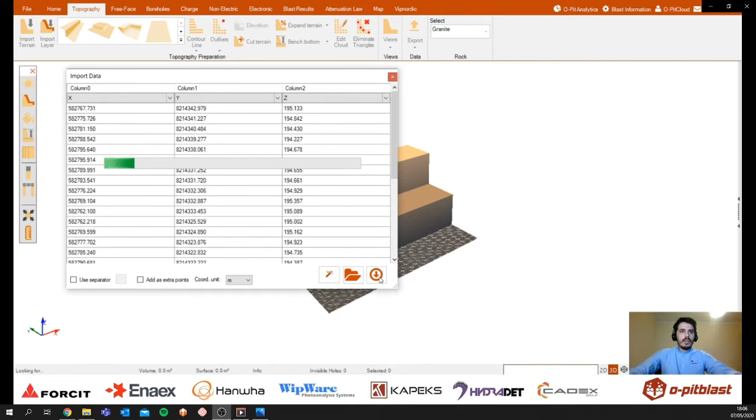Now the software asks us which is the X, Y, and Z information on the file, so the software can produce the triangulation. It will ask us for outliers. We recommend eliminating those outliers. Okay, so this is the terrain, finishing the triangulation.

This terrain was built in the field by a GPS survey controller. So we don't have a lot of detail like it would be from a drone. But I will show other examples.

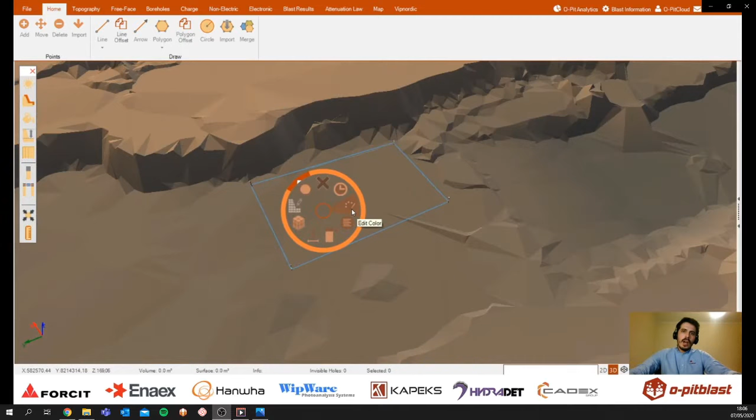Let's start by importing a polygon from the planning team. They will send you a polygon, and here you have to use a separator. In this case it's a comma, and again, tell the software what is X and Y, and import. Now we have here our polygon. We can change the color to have a better look.

We will blast this as a box cut because we don't have a free face. So another thing I want to show is how to import layers, and I will import the layer of the pit shell. Just like importing a terrain, you have to tell what's X, Y, and Z because we are working with CSV files. So this is the pit shell.

So we have here the pit shell, this is the final pit. Now I will also import the floor and the roof of the seam.

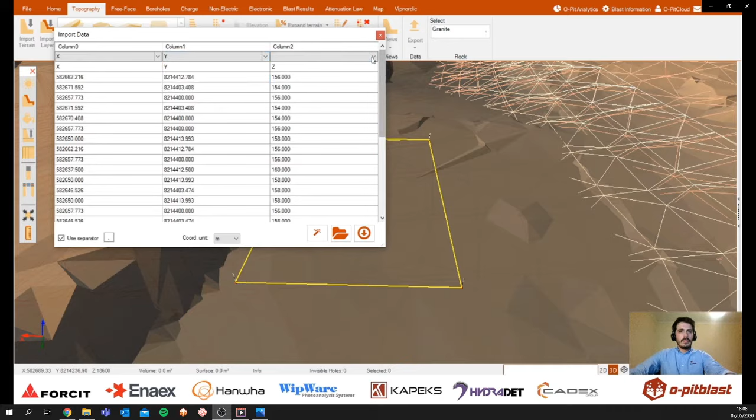Again, same method: separator, X, Y, and Z. And this is the floor. And again, the roof, I will import and call it the roof.

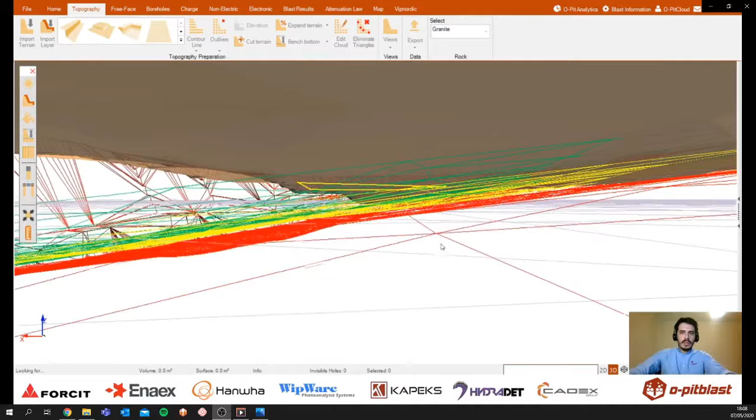So I will now change some colors for you to understand what we have here, a lot of information. This is the bench bottom, this line. For example, let's change the pit shell to red. We can change upper and bottom color. The floor can be yellow, for example, and the roof can be green. So we can see we have first the pit shell, then the floor in yellow, and in green we have the roof.

I will start by throwing some holes here. We have this big function, add hole. By right clicking on the polygon, I will set up my burden and my spacing, and I will set it up as a staggered pattern. I can adjust here. If I'm happy with it, I'll press OK.

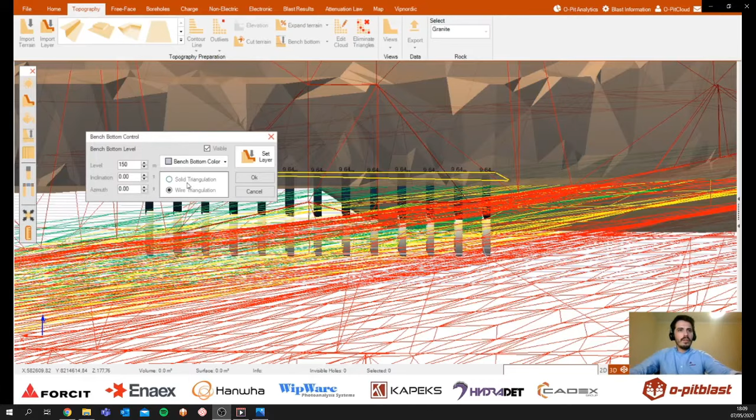These boreholes are going all the way to the bench bottom. You can see they have a subdrill. They are going to the bench bottom. I will change my bench bottom for you to have a better look, for level 150. So now it's below.

Let's edit all the holes to the bench bottom. Okay, they are on the bench bottom. They have 1 meter subdrill. I can take this out — no subdrill. Okay, now they are right on the bench bottom.

What I will do now is throw all the holes to the pit shell. I don't want to drill below the pit shell, so I'll adjust and apply for all the holes to the pit shell. Yeah, cool, they are right on the pit shell.

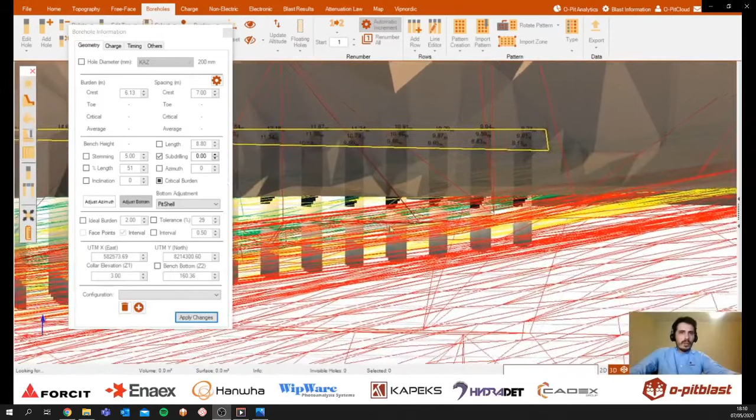Okay, so we have a lot of information here. I will set this up — for example, maybe we don't need to see the pit shell now, and we don't need to see the bench bottom either, since we are not working with the bench bottom. We can clearly see that we have a floor in yellow and a roof in green.

So what I want to show is a cool feature that we have: to apply charge and apply an automatic decking between layers. That's what I'm going for now.

So we can click in a hole. Let's open this window, borehole information. I'll make it bigger like this. Let's also set up here first and change the aspect of these layers, because I'll put this as a solid triangulation, so the floor will be solid and also the roof will be solid. I think we can see better like this.

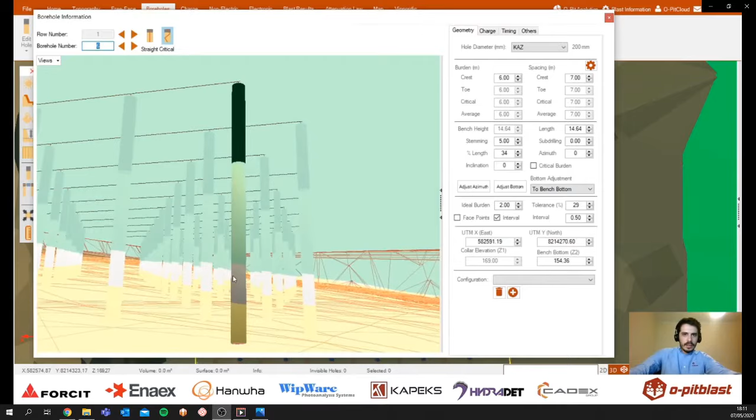So entering one hole, the borehole information. Let's see this hole. Okay, we can clearly see this is the pit shell, and we can clearly see below the seam and above the seam. Okay, so let's put some charge.

Quickly set up two elements. Can be a booster, put a booster one, and emulsion - this is bulk explosive, Kemix. Forcit. I'll put 100% of the charge column. Okay, but I don't want this. I want a deck, so I can apply. I want to set a deck between the floor layer until the roof layer. Okay, and I will apply. And now I have here my deck.

I don't have explosive, it puts another booster for the next charge, and we can see clearly that it's cutting on the layers. What we can do also is, for example, we can change the offset, and I will show - for example, I'll do this again for you to understand.

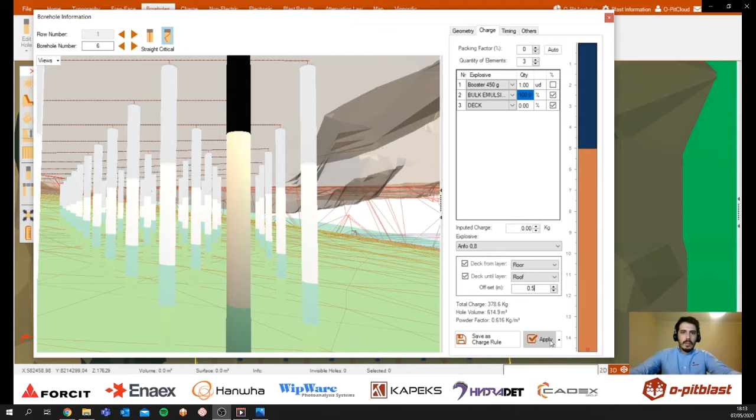100%, and then set up a deck. But now we want from the floor to the roof, but we want an offset, for example, a meter, and we apply. Okay, let's see. We have here a meter. We have one - no, the seam is 2 meters, and then a meter again.

Okay, so I can also apply for all the holes, and we can see in different holes. Okay, you can see clearly. Okay, so all the holes are charged exactly the same way. Okay, when they have this red circle, it means they are charged, and we can also see the charge.

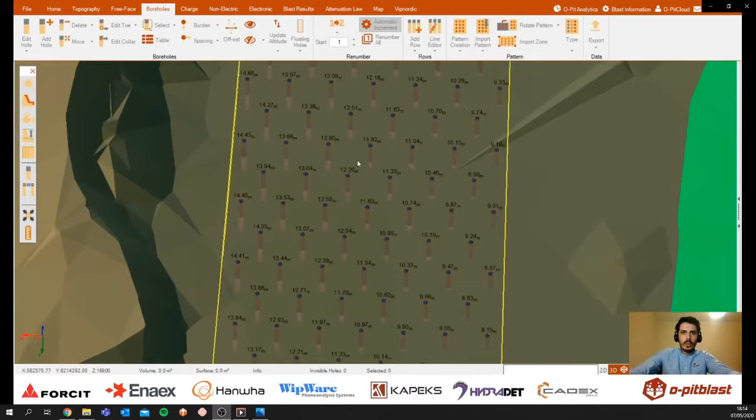Okay, let's see. Charge instead of length. Okay, so they have different charges because they have different quantity of explosive, because also they have different lengths. I guess this makes sense to you.

So I want to show another cool feature that we developed, which is that we can edit holes by geometry. Okay, and for example, I don't want to drill less than 10 meters, so I will filter all the holes that have a length below 10 meters.

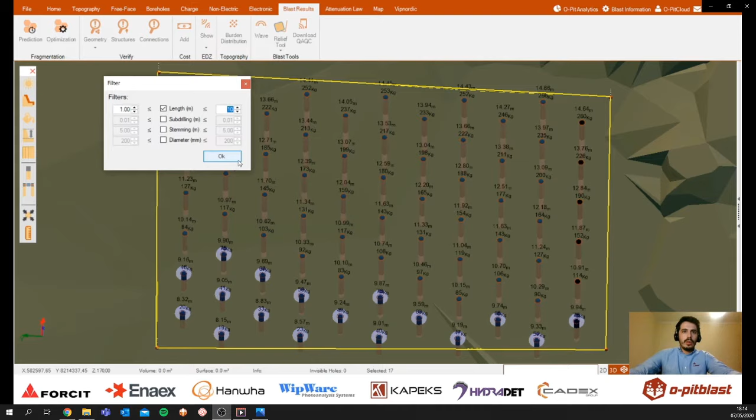Okay, and now I will go to boreholes, I will edit those holes, and I will say my length will be at least 10 meters. Okay, not 100, 10. And apply, and every hole has more length than 10 meters.

Okay, so they are all charged, and this is a box cut that I want to show you. And let's go, for example, to print to see the average charge rule. Okay, charge rule design. So this would be our charge rule.

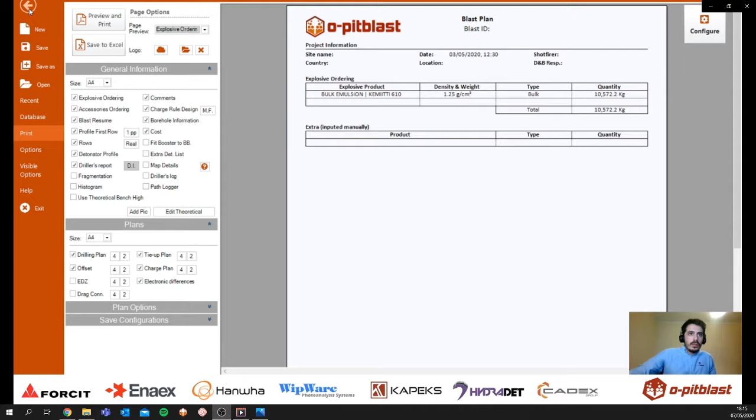Okay, so now going for another type of blast, I want to show a final pit design. Okay, so we'll start by importing another terrain. It will be a final pit design.

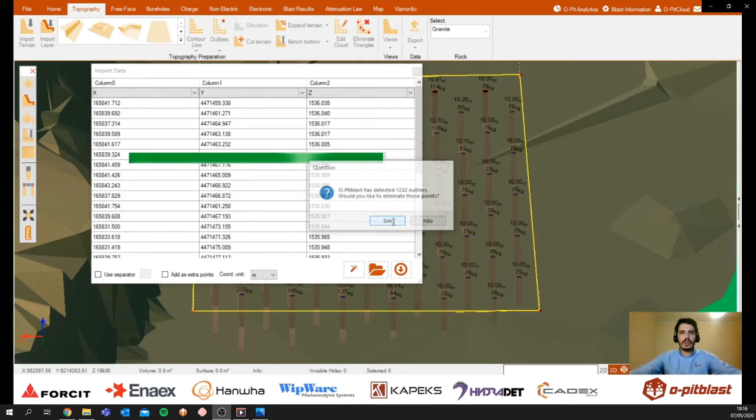We have here some final pit, final slopes, and we want to do the next one. Okay, so I will start by importing a line. This is the line of the crest and the toe of the slope, 1536 of relative level. Okay, I will import this LW polyline. I will select X, Y, and Z.

Okay, cool. And we have it here, so we can see the crest and the toe of the next slope. Okay, another thing that we can do from the same file is we can import this as a layer. So let's do it. You will understand what's the idea - get a better view of the slope. Okay. Yes, so this is a layer. Okay.

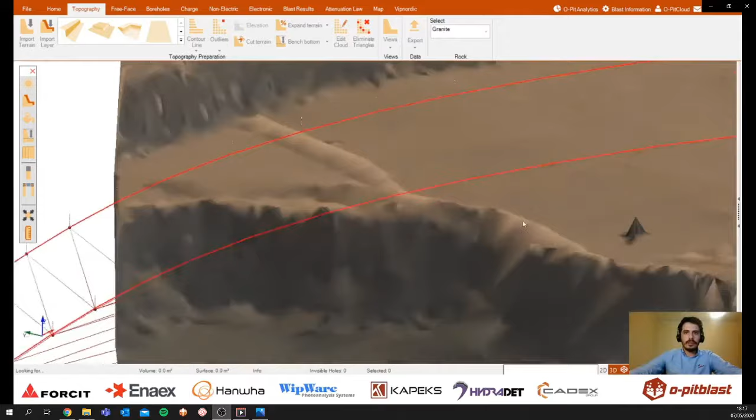And again, our team of planning sent us a polygon. Let's import that polygon. Here, import polygon, separated by commas, X, Y, and Z.

Actually, we don't need Z for the polygon. This will apply on the terrain. You can change the color. Let's work with yellow. Okay, let's see in 2D view.

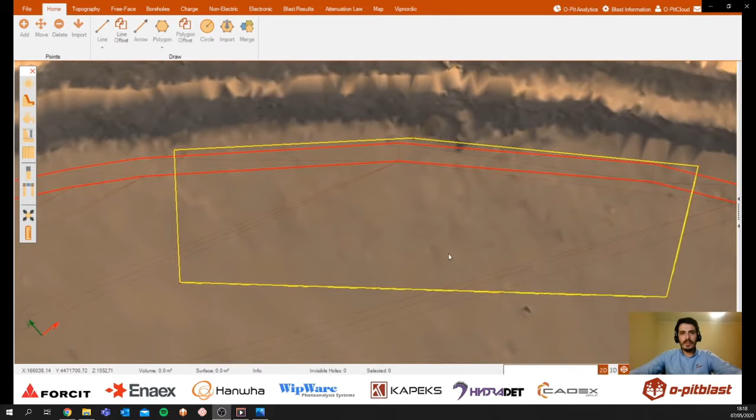Okay, we have here the polygon, and we have the crest and the toe. For this type of blast, we want to respect the position of the boreholes on the crest, so maybe we could do a pre-split and buffer holes.

We have a cool feature for this, the creation of pattern from line, and I will explain how this tool works. So it's based on a line, and we have to select that line. Let's start by selecting the crest line.

Okay, so we have it selected, and now we will create more rows. We will choose reverse to put the blast on this side, and we can choose staggered. And now a cool feature is that we can choose multiple burden and multiple spacing.

So my average will be 6 by 7, 6 burden, 7 spacing. I will put this here also. Okay, so between the crest and the toe, I have 6 meters of distance.

I will put the row of the burden of the buffer to be on 7, for example. No, actually, let's put it 8. Okay, sorry, I misclicked here. Reverse. Okay, and the spacing, let's put it by 7.

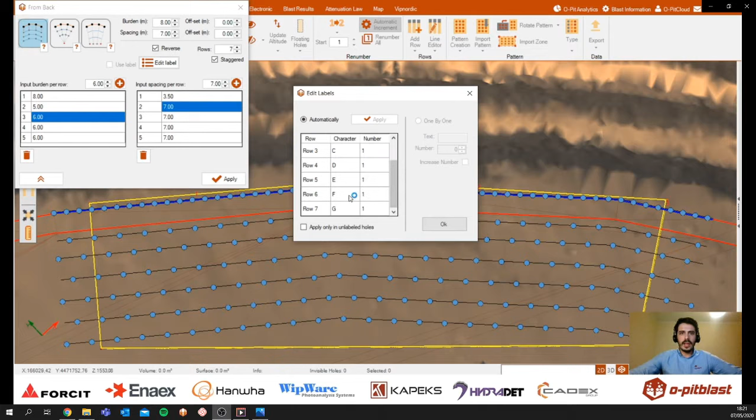One thing I can do right now is edit the label, and I will choose automatically. For example, the last row I'll call pre-split, and maybe call the other buffer, and press OK to see the label. And when you feel everything is okay, you press apply.

So let's see. Okay, everything is applied. We have a lot of information here. Charge, we don't need to see charge for now. And length, we don't need that either. Okay, so you can see pre-split, buffer.

So you might ask, why don't I have boreholes here? I want to show you that we can adjust by adding a row near another. Okay, so it's asking me after what row. I will choose after row number 1.

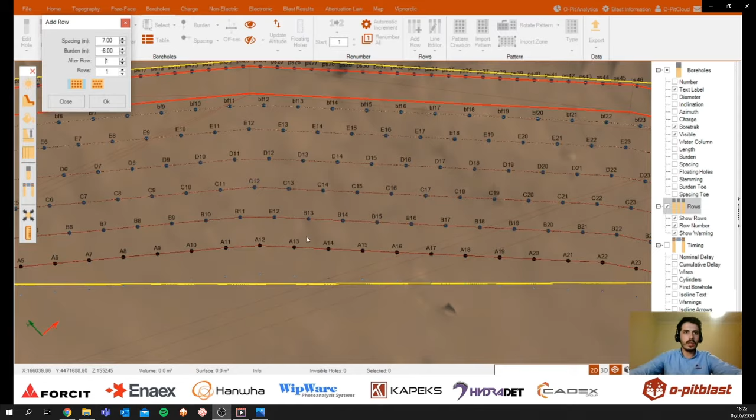And if you don't know what is a row, we can show rows here. So row number 1, let's add one row of boreholes with the spacing of 7. Keep the same spacing, and the burden will be 6, but we want negative 6 because we want it for this direction. Okay, and we want to choose staggered also. Okay, one staggered. Okay, we are happy with this, and one more line.

So the next thing I would do here, let me just take this out, would be selecting all the holes that are out of the polygon of the blast. Okay, and I will delete by just clicking the delete button. Delete all the holes outside the polygon. Yes, please. So everything is set.

And, for example, now I can show you some adjustments. For example, this hole is outside. I will move this hole, and I will show you actually some other features that we have, like proximity ring, where we can select the radius that we want to see and that are critical to us.

And for example, 4 and 6 meters. So in this moment, I know that this hole is 6 meters away. Okay, so I will adjust like this, and I can adjust these holes here also.

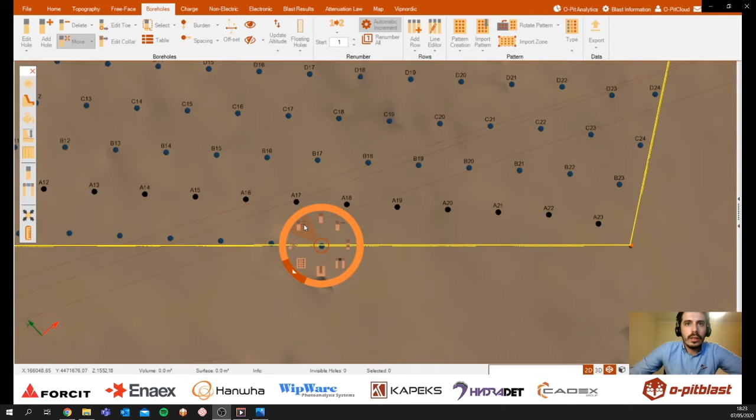So I'm showing you these tools you can apply on your blasting project. I can add more holes in the places I feel that I need to add them. Let's see if they are correctly positioned. Yeah, cool. So with this tool, you can see distance between all the holes in the surrounding area.

Cool. Yeah, so that's the idea of the adjustments that you can make. So what I want to do now, I can quickly delete the polygon.

I want to do now is select - first I have to correct this. So I will show the importance of the line editor. The line editor is for us to tell the software what boreholes belong to each line. So this is very important for renumbering and editing labels automatically.

Okay, so by doing this, I'm telling the software what hole is in each row. Okay, we have to draw, but you will see that this is very important. Almost.

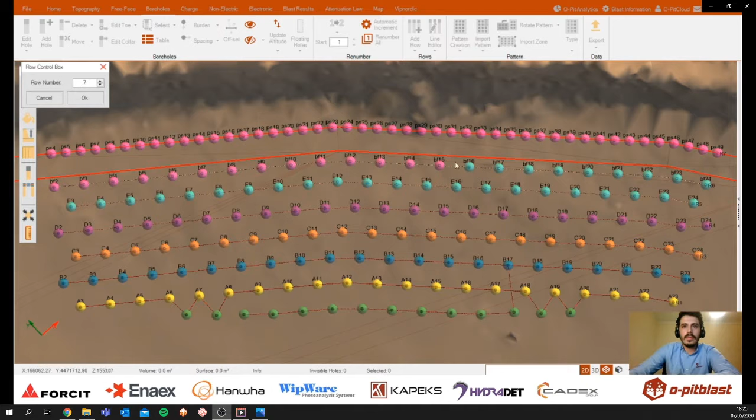Okay, now you press split. Cool, so now I can easily adjust this automatically. Same idea, buffer, press split and apply. Okay, so I got A, B, C, D, and therefore.

Cool thing I want to show you is to select the contour holes, and we will edit this type of hole. I will say these are the contour holes. Now the same thing on the buffer holes. I will say these are the buffer. The other ones are...

Production. Okay, I can select all the other holes as production. Now I can change individually some parameters, or I can keep changing from all blast holes.

For example, let's put a diameter of 311 millimeters, so this will be my diameter. And let's change some things, for example, stemming. Okay, and adjust this all to bench bottom.

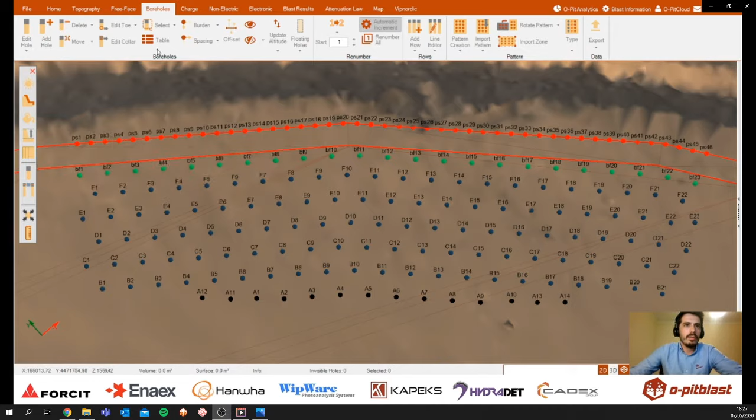Let me just verify the bench bottom. Let's put on the same level, I will do this again. Just bench bottom.

Okay, so now that I have everything defined, it's easy to change the parameters. So for example, I'll just change the buffer boreholes and change diameter. Instead of 311, I'll put 270 millimeters, and I will change the stemming for 7 meters, for example.

And I will put here a sub-drill of half a meter. Okay, cool, apply. Different stemmings.

I will quickly change the production holes to have a sub-drill of 1 meter. Okay, other parameters are fine.

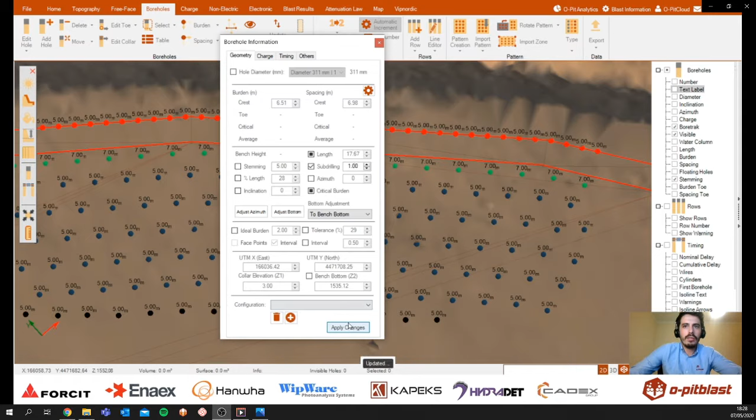And now I will change contour, and I want them to have like a 9 meter stemming and no sub-drill. I will change diameter for the blast because it's a pre-split. I will apply. Okay, so now I have different diameters.

You can see. But now, because I want to respect the slope, it's important to define the inclination and the azimuth that we want. So I will set up this azimuth. I want these boreholes to have inclination in this direction, this on this direction, this last one in this direction. So let's start by selecting just these boreholes.

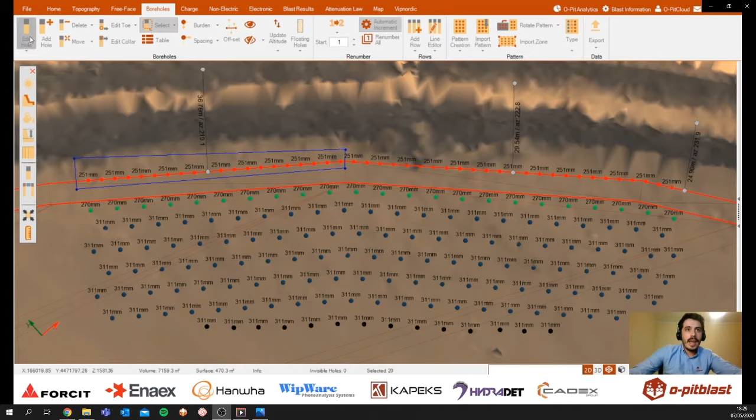And edit. Okay, so these boreholes will have an inclination. I'll put, let me see, for example, 20 degrees, and the azimuth will be here, this azimuth, 219. Let's see what happens. Apply. Okay, they already have some inclination.

I'll do this for the next trench of contour. Edit, inclination, let me put the same, and azimuth, let's see, 223. Okay, let's see if this works.

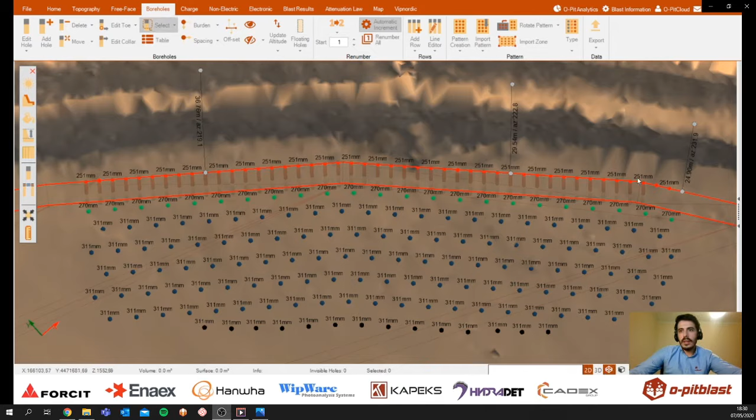And the last boreholes of contour. Let's see, edit, the same inclination but a different azimuth, 232. Okay, let's see how it goes, if I need to do some adjustments.

Yeah, let me see, these boreholes are a little bit closer. I can see the burden or spacing in the toe. Yeah, so my recommendation would be to change a little bit here the azimuth.

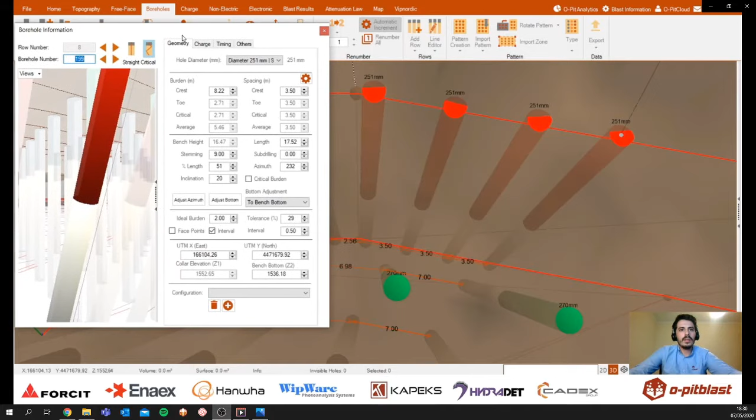Let's see if this works. Yeah, a little bit. And also here, you can take a little bit the azimuth. Okay, makes this more even. Yeah, I'm happy with this.

Let's see the result of the design. Let me take this out. A lot of information. Okay.

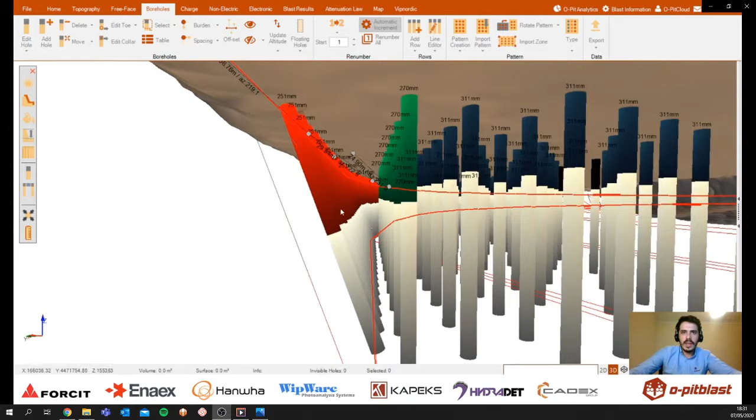So now I have a pre-split complying with the slope with different stemming. Then I got the buffer with just half a meter of sub-drill, and then I got the production boreholes. So this is my suggestion of designing the final pit design.

And you should mind the length of the boreholes, depending on your type of operation and your type of drill rigs. But let me just see the length, because the length is provided by the topography that we have in this moment. But actually, what you have to export for the drill rigs should be a CSV, or depending what type of file you want.

But if you are doing a CSV, I would just recommend to export the label, and then the toe position would be, and the collar position. So you don't need the Z of the collar, you will need the Z of the bench bottom that you want to do. So this is my suggestion for this type of blast.

Okay, and finally, I will import another type of terrain. I want to show you a different type of blast. It will be a free face blast. Okay.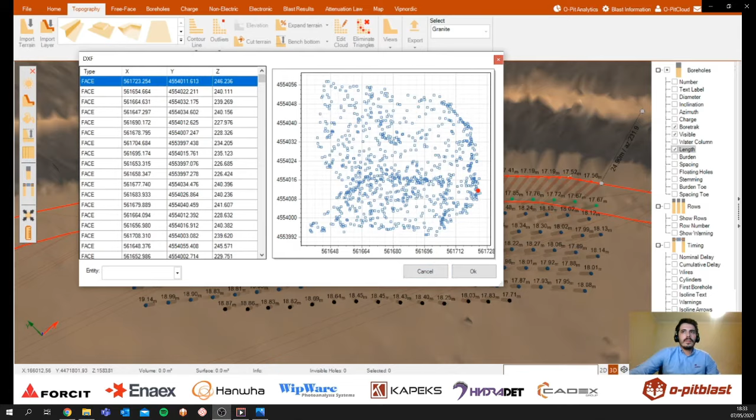So again, same procedure. For this blast, I will import terrain built from drone topography. Okay, this has more information, so it is taking more time.

But for the free face blast, we would recommend using drone technology, in which you can keep more data, more quantity of point cloud, to have a better idea of the free face. Because if we have more information on the free face, we can adjust the first borehole to have a better critical distance of the burden on the free face, and that's what I'm aiming for.

Finishing the triangulation of the terrain, as I told you, was built from drone survey, so we can see the amount of detail we have here on the free face. So I can show the points, or let's see it as a wire triangulation, you can see a lot of detail. It's better for this type of design, free face blast.

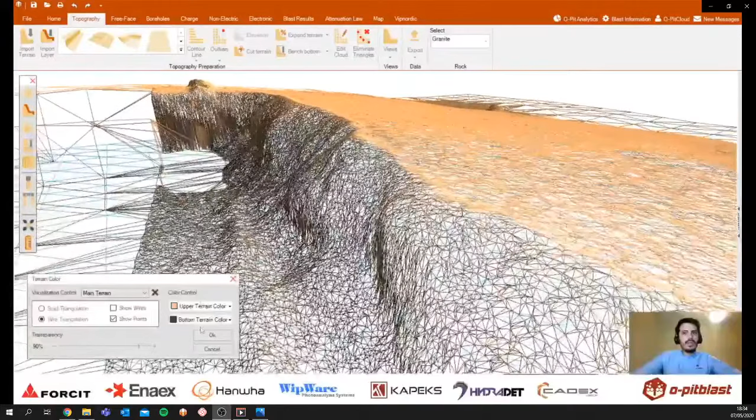One thing that is very important is that we have to build our database with our products: detonators, boosters, bulk explosive. Set up our diameters, everything. This is very important. And putting price tags on every product. The moment we have that, we can start our design.

So the first thing here would be to set up the crest and the toe. Let's go here and design the crest. To help with this, we can set up a contour level, a contour line. So now I can go here, start designing. I will design my crest, but obviously I'm not very rigorous, I'm not very accurate.

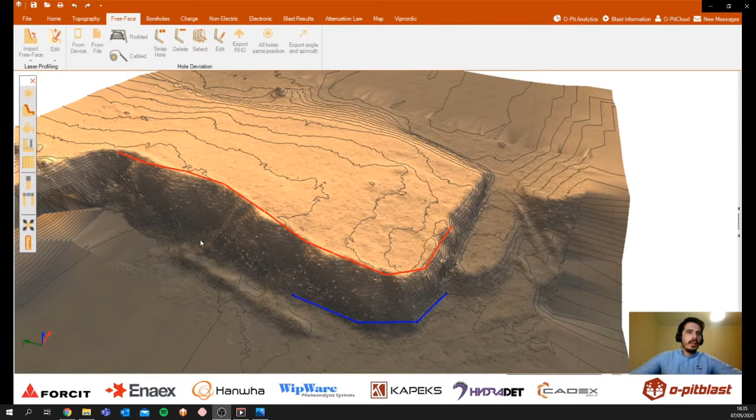So the best thing here is to ask our survey team to go and survey the crest and the toe, and we can import the file directly. So I will import the crest. I will have to set up X of the crest, Y, and Z. So now I have my crest, and I will do the same to import the toe as a DXF file, with X, Y, and Z.

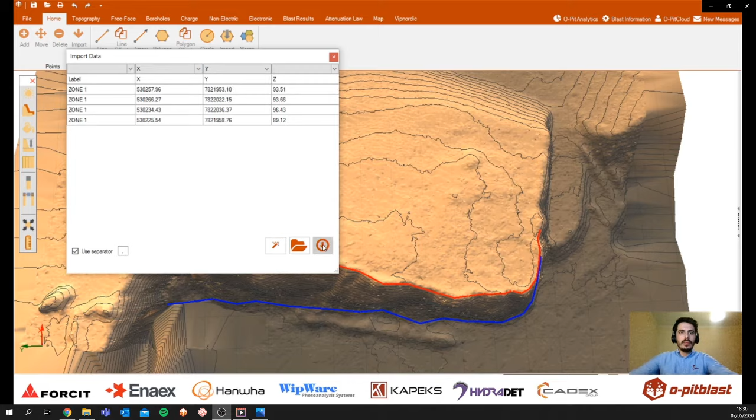Another thing I have to do is ask the planning team for the polygon, and let's import this polygon they want us to blast. Again, same thing, X and Y. Let me change the color for us to see better. So now I have my polygon here.

I can start with the design. I will recommend the create pattern tool, just clicking. It's good to use the attenuation tool. Also, I will explain how this works. Let's choose the burden. The spacing can be 3 by 3.5 of spacing.

Now we have to place the left mark on this part of the blast, and this azimuth is very important for the last row. So it can be like this. Let's choose the number of holes per row, and let's choose the number of rows. 9 is okay, and let me also choose to have a staggered pattern. So now it's staggered.

Okay, for me it's cool. I will just show that we can do also multiple burden and multiple spacing. And for me, it's important that on the first row, instead of 3 meters of burden, I have just 2 meters, to try to adjust this better to the free face. Let's see if this goes well. On the moment I finish this, I'm happy with the result. Let's apply. We can still make a lot of changes.

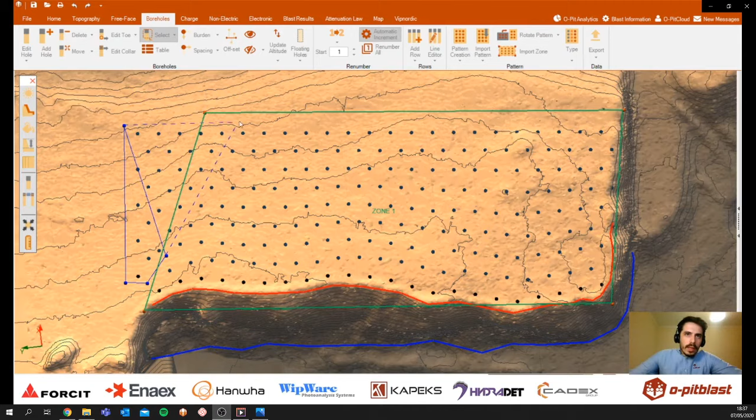So the first thing I will do here is select these boreholes that are outside of the polygon. But even better, I will cut this blast like this, because sometimes instead of complying with this area, if we do this type of cutting of the blast shape, it's very helpful for the blast itself.

Another thing is, let's check the length of the boreholes, because I forgot to go to bench bottom. So the bench bottom is on 84. Let's see, we have here the Z. We have some loose material here, but it's like 86, around 86, so I want 86 to be the bench bottom, and let's edit all the holes to the bench bottom, adjust bottom. So going to change, everything is set up.

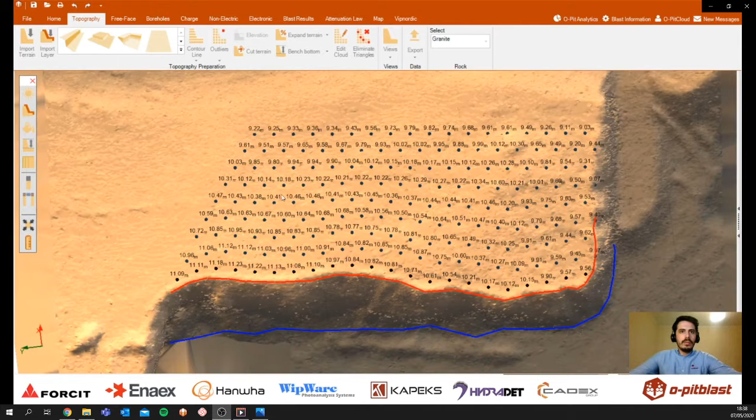I can now close my polygon. I don't need the polygon. I can take also the contour lines, I don't need those. Also, the bench bottom can be invisible. So let's work like this.

Okay, so you can see after 23, I'm going to 25. After 161, I'm going to 166 because I deleted some holes. Let's go here and renumber all. Everything is set up.

One important thing here is to define the azimuth and inclination of the first hole, because we have a free face that's very inclined. So we have to adjust our holes better. Let's see how we can do this.

The first thing would be to set up the azimuth. Let's place the ruler, and for this direction be 277. Okay, so let's go to the first row and define the azimuth at 277, with no inclination for now.

So this is updated. I take this out - it's left control and right click on the mouse. I eliminate it. Now let's check how this hole looks. Let me put this bigger. Cool, one moment that I forgot.

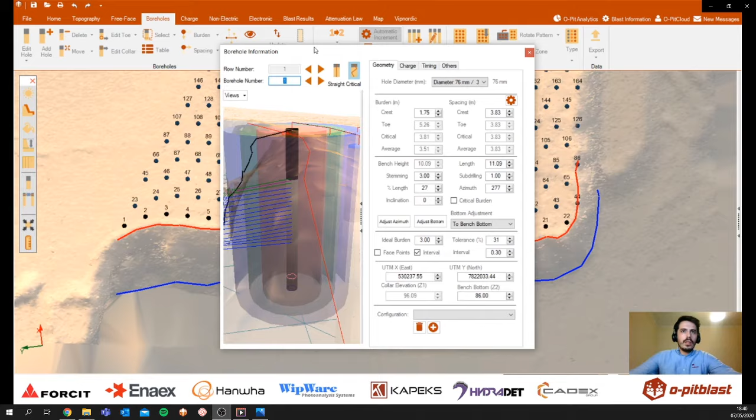Done. So now let's go here, because now I have explosive charges here, so I can see the critical burden. That's a very cool feature of this software O-Pitblast, that it's calculating the critical distance. So I have an ideal burden of 3. I can choose these intervals of offsets that I can see. I can see the face points.

I will take these critical zones - we don't need that for now. So let's check this hole. I will clearly need inclination here, because the free face is inclined. So let's start by increasing inclination, up to a moment that I have this better adjustment.

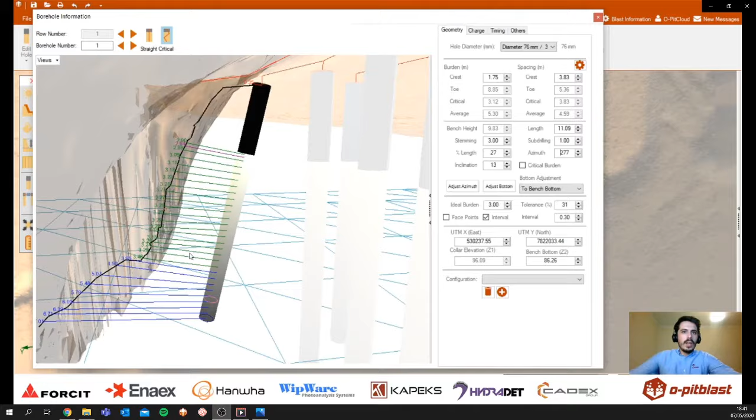If I increase it a lot, what will happen is that this will start to become very critical and low, and I can have fly rock. So I'll go all the way until that moment. Now I start to have here almost just 2 meters.

I can take the other holes, I can leave this hole, take all holes. Yes, so you see, it reaches a moment that it's dangerous to put a lot of inclination. So I will take this all the way through, because sometimes this is the best adjustment I can have in my free face.

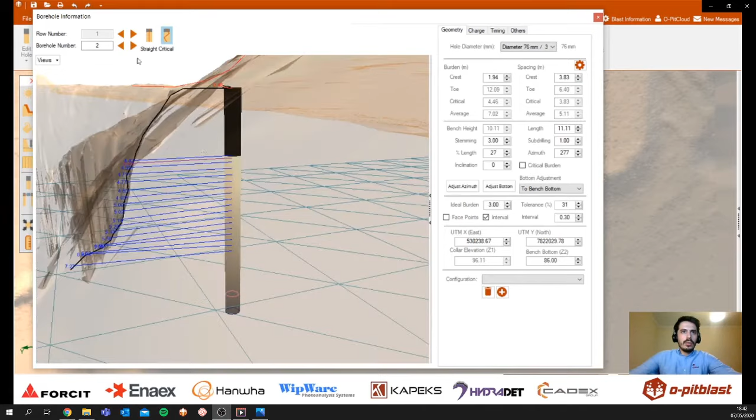Okay, let's go to borehole number 2. I already know that around 20 is okay. Yeah, this is completely adjusted. 26 - let's see with 26. Okay, let me see if I can put more. Not bad. So I will do the same.

So I'm in borehole number 4. Let's go and do this quickly. I'll go select all these holes. Edit hole - it will edit everything. Let me put 25, and let's go.

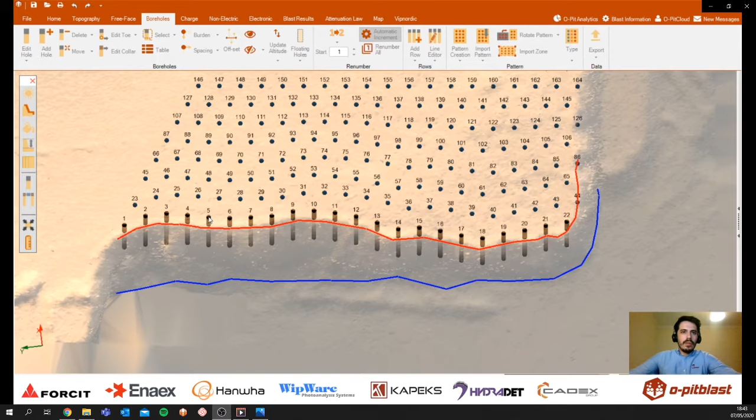So now the 5th - but you got the idea. We should see all the holes, and we should see all the holes, and if they are adjusted, cool. I will leave this like this.

But now we have the second row that should have also - we can see burden on the toe. You can see now that we have like 3, and now we have 8. So what I will try to do quickly is to set up some different inclinations. I will make it smooth, up to make this more balanced. Okay, I will leave it.

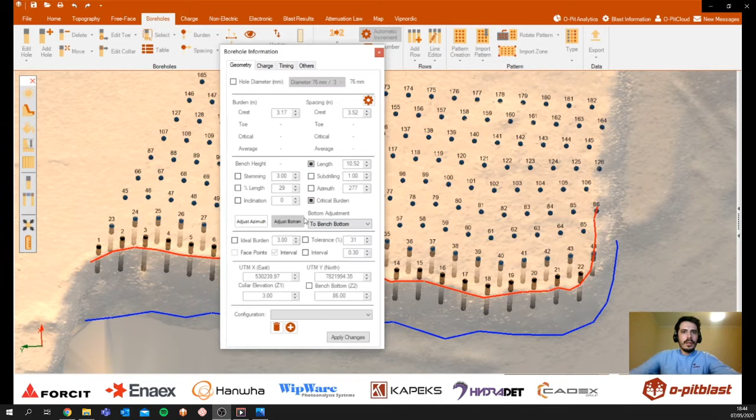Now let's put like 20 degrees of inclination. Now let's put a little bit less, like 13. Okay, and like 7. Okay, so we can see the burden on the toe is more balanced.

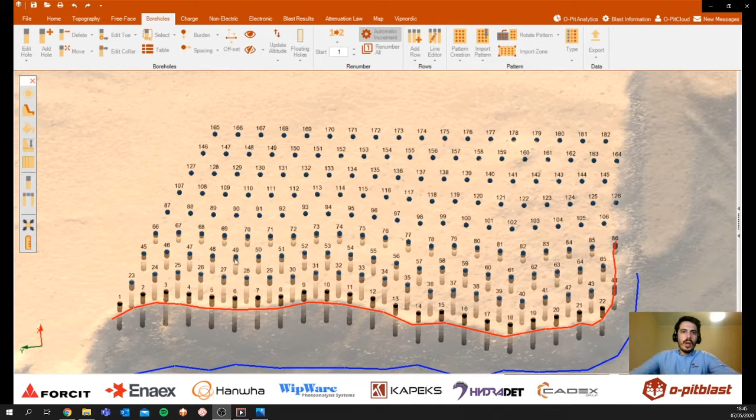Okay, so this is a cool thing that you might have a thought on. So I'm happy with this. Another cool feature we have is to, on the results, see the burden distribution. It will calculate the burden distribution on this ideal burden that we selected - I selected 3 meters. So I should have a burden around 3 meters.

If it's less burden than that, it becomes red. If it's very high burden, bigger burden, it becomes blue. So what I want is - you see I adjusted these holes, and this wall is more green. These holes I leave like that, and they are blue, meaning in this area I might have some boulders and bad movement. On these red points I might have critical burden less than 3, or almost 2, so I can make some adjustments.

So I'll, for example, put this hole a little bit to this side, and let's see what happens.

Let's calculate again the burden distribution. We want all the blasts to be green, that's what we were aiming for. So this tool is good to see the critical burden. We're just waiting for this.

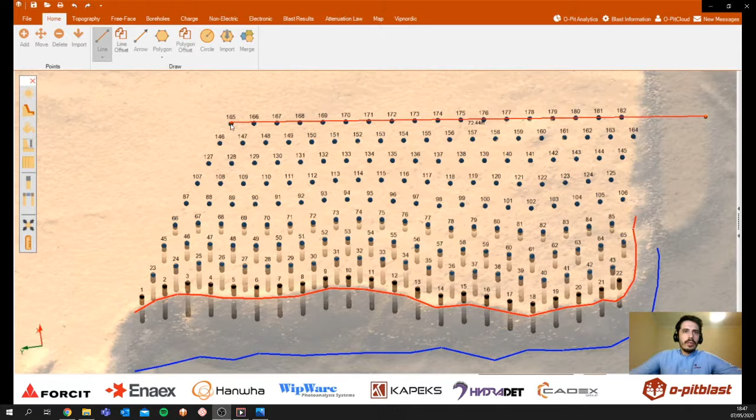I would create a line, simply create a line like this, and from here up to here. Now I would create an offset of this line. I would select both segments, put reverse, and I want a 2-meter distance.

I'll apply. Okay, cool, I have my line, and now I simply go on boreholes, create pattern along a line, and I will select my half of the spacing, that's 1.25, and I will select here.

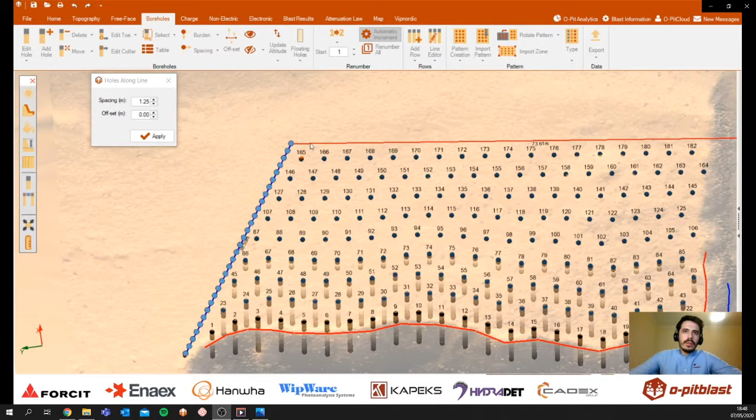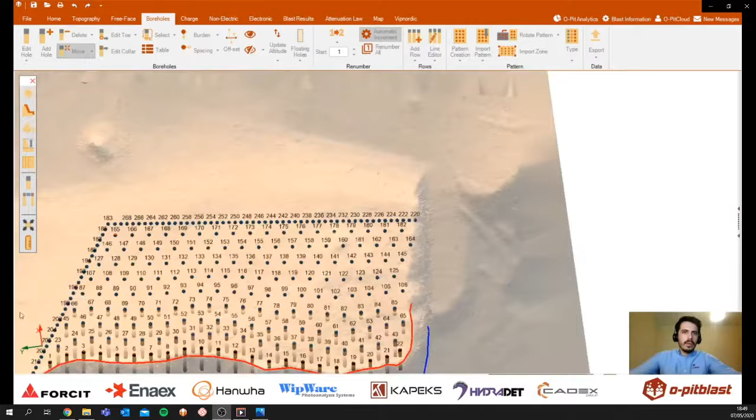Okay, let me put just an offset. Okay, it goes like this. I will delete that - oh actually it just created one hole. Yes, so now I have here my presplit. Let me just correct this.

And obviously I will renumber all the holes. And now I'll do the line editor. So I have line 1, 2, up to, let's see, row number 7, 8, this is 9, 1, 2, 3, 4, 5, 6, 7, 8, 9. I will edit the 10th row. The 10th row will be this.

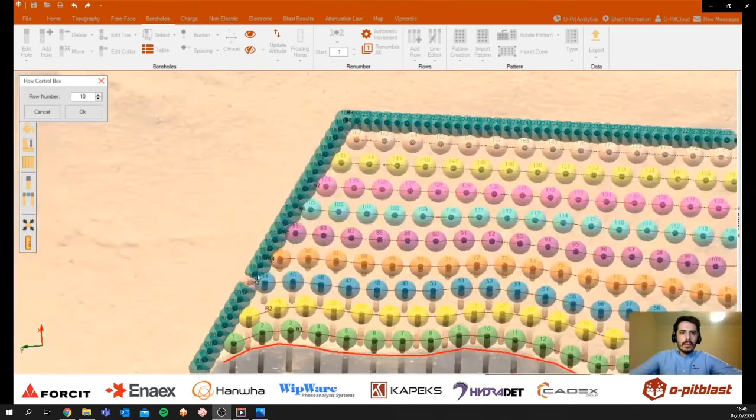Okay, so now I can quickly edit the holes label, and the 10th row will be the presplit row. Very easily, let me take the number and put the label. So A, B, C, all the way to the presplit.

Cool, I'm happy with the results. So let's go to charge this all - before that, I'm sorry, let's just select the presplit line, and identify this row of holes as contour.

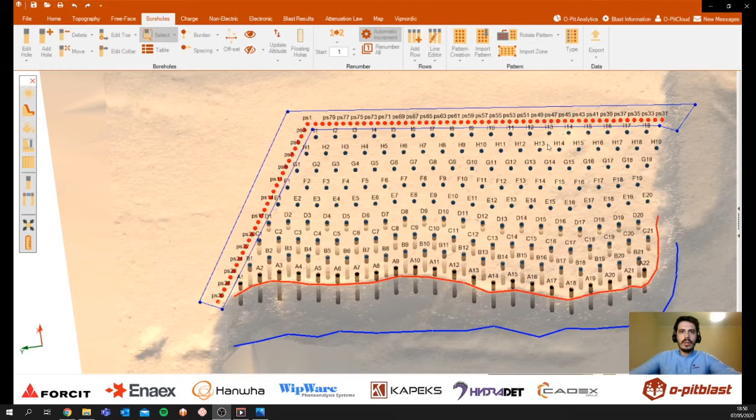Okay, so now I can do a different thing. I would basically edit parameters for the contour. So I want less diameter, okay, and I want, for example, bigger stemming, and I don't want subdrill, for example. So I'm happy with the design now.

So let's go for charging, let's use the same charge rule. This is Kemitti charge. I can show you the charge rule - actually I just have a booster and bulk emulsion Kemitti from Forcit, and I will apply for the contour.

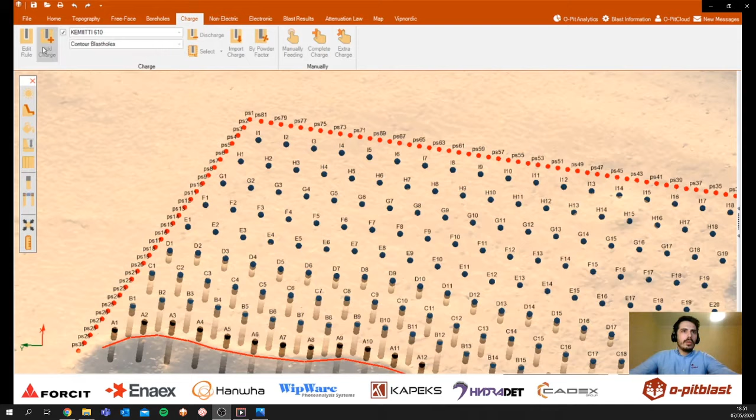And now I will apply also the same for production. You can do this type of analysis, choosing different charge rules for different types of boreholes. So let me see, I have these charges. Okay.

And now let's go to the tie up, let's choose electronic. And I will do here, for example, I will use this tool vector and choose a different angle. I'll choose, instead of, because this will make a vector - like this, I will choose a different angle, for example this angle.

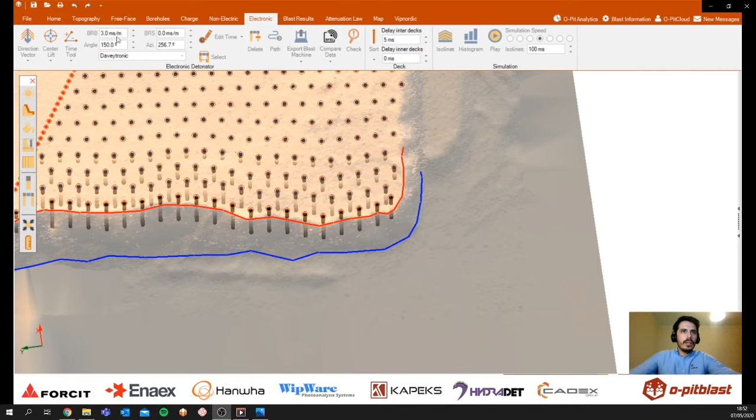And I have to choose the burden relief, I'll keep this at 3. I like to see this like this. So let's go, I just have to select timing. Okay, let me see the simulation.

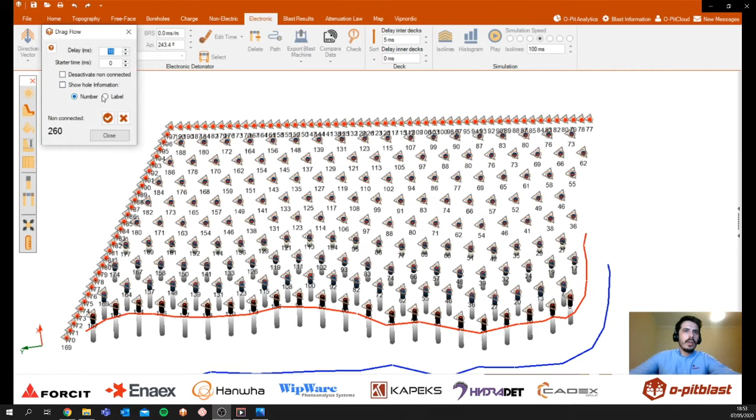Okay, you can see right away that I have a problem here, I don't want the presplit to go at the same time. I want this presplit to go before. So I can easily use the drag and connect or drag flow tool, and I will set the time to 0 for these holes.

Drag connect. I was playing with the scroll on the tab, and if you do that, it will scroll all the way and navigate through the tabs. Oh, I'm sorry, this changes it to 10, let me put 0.

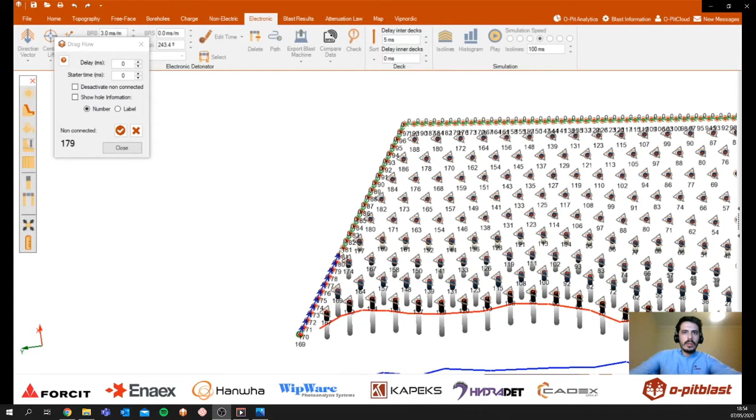You can see I'm with different colors. If you want to have different starting times, you can do like this. So in the moment you join everything, it will become just one color. So I'm happy, every borehole of the presplit has the time 0.

So let's see a simulation right now, so they all blast, and this carries on. Okay.

So I forgot to tell you, I have to choose here my detonator. I choose Daveytronic, but as I told you, we have here on the database all the things that you have to put for detonators. Okay, you have to insert here and put the price.

Because I'm talking about tie up, and this is so important to vibration prediction, I will quickly show how we can do vibration prediction in our software. So we have to import seismographic data, our records, and then we can choose if we want to import all the channels, but we can work only with the vector sum, the distance, and the charge.

When it's set up, we import, and it will generate an attenuation law. We can choose to see this on a logarithmic scale. We can, for example, see the low values of PPV. These are some outliers, and we can choose to eliminate the outliers, or if we want reset the values. We can increase also our confidence level, and I will save this attenuation law.

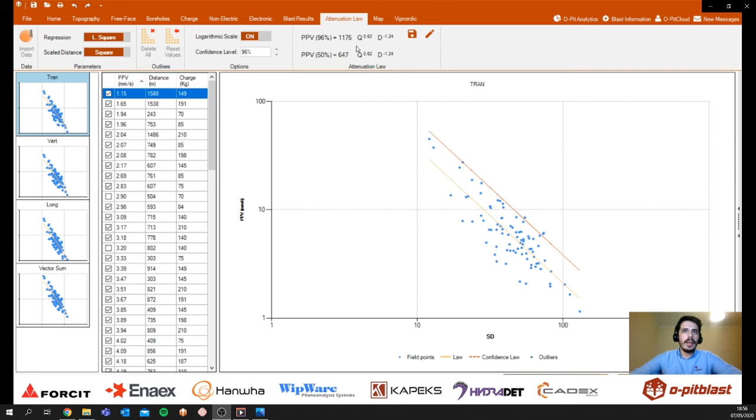It was insert, and now I can see how this will affect the structures on a map. This terrain that I'm working is on UTM zone 55, hemisphere south, so it's here on this mine, and it is already integrated with Google Maps. And what I have to do now is set up my structures that I want to preserve.

So for example here, let me see, petrol station, and I choose the PPV limit. It can be 15. Then let me put here a structure. It can be a power plant.

And I can put a lower PPV. That's the idea, we put the structures that we want to preserve. I'll say this is house, and it can go all the way to 16, for example. And when I have my structures, I just have to check the PPV limits, insert my attenuation law, and it will calculate.

You can see in 100 meters I have 262 millimeters per second. On 600 meters I have 28, and we quickly go to blast results and click on structures. At this moment I don't have a problem with the structures. It was lucky, it was lucky.

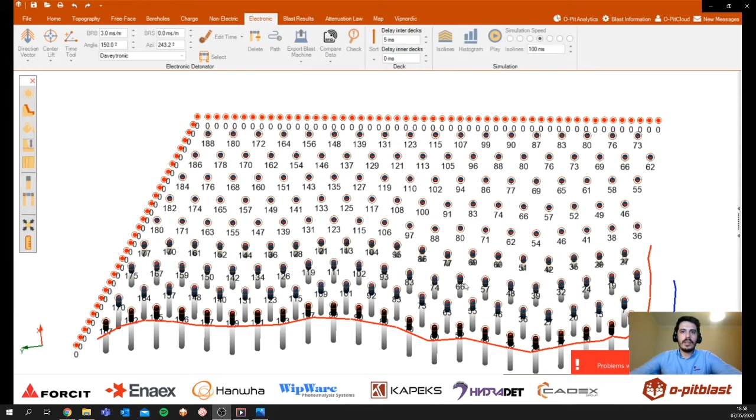...is that we can fix this automatically using the fix function on histogram. But for that, I want to remain with my presplit in at the same time. So I will do quickly a polygon here. I will select to fix just inside this polygon. I'll call this polygon production.

Now I just have to click on histogram. I'll choose the window of time that I want to fix these holes, and I will select production and normal. So we can see we just have one hole blasting at the same time per time in the production, but presplit they keep the same. So let's do another simulation, and it's cool. Obviously this has delayed my blast, but cool.

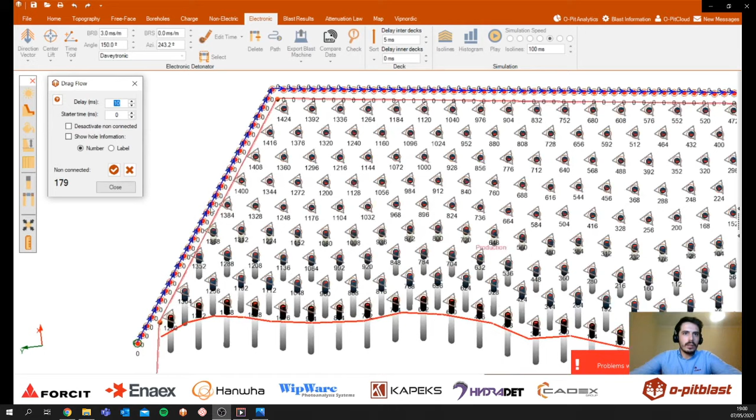So let's see, I still have problems with the structures because my presplit has a lot of holes, so a lot of charge also. So I could quickly make some changes on the drag connection. I will split this by trench, so I'll have like here.

Then I'll put some delays to divide this. So they are now in different time frames. Okay, close.

So let's see, now the histogram is a little bit different and slower. So let's see blast results. Cool, so I don't have problems with the structure now.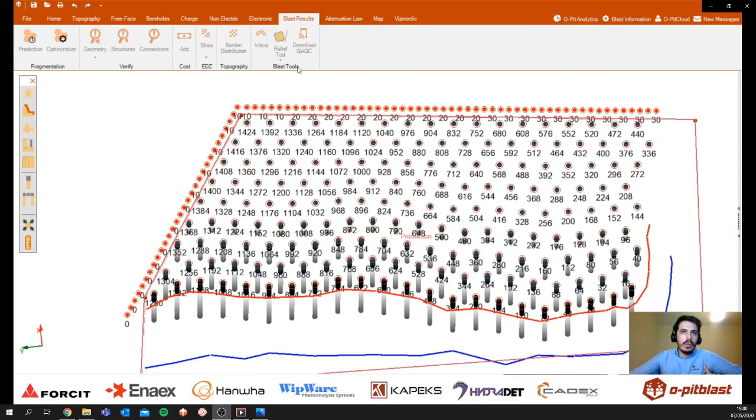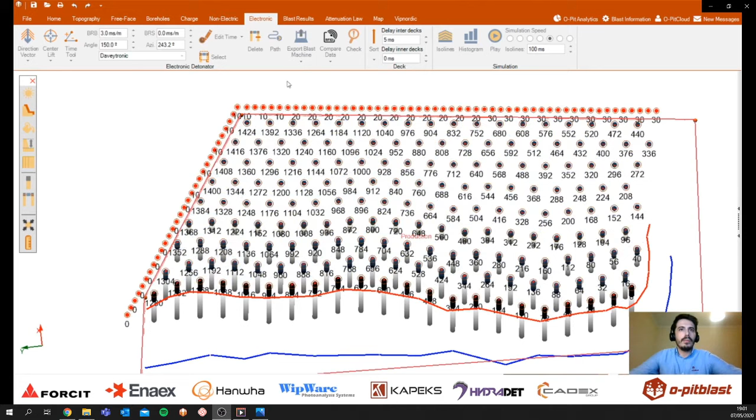So let's finish the tie-up. Now I want to export this for the field for my Daveytronic system. Let's go. Okay, but the software is telling me the connections are apparently fine, but I have to verify the path. Obviously, I'm sorry, but I forgot to make the path. So the path is just the order of connection, the order of the programming on the field.

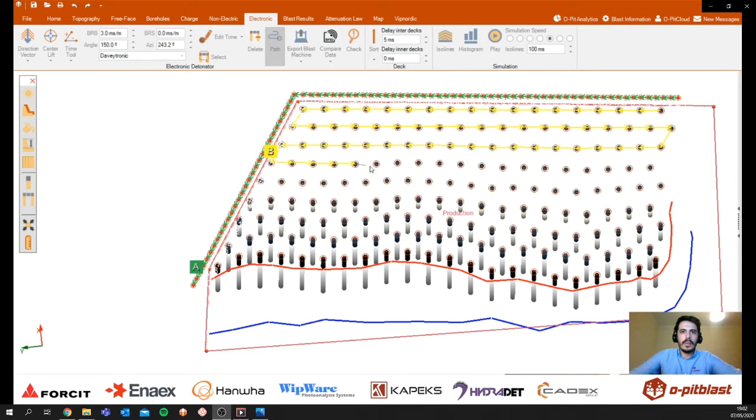I can, for example, this is a pretty big blast. I will say for one logger, it will do this path, so it will connect all the presplit holes. And the other logger will do... they can start side by side, and they will do this. I just have to tell the software what will be my route of programming this.

I will just show you, I'm doing this, and if I forgot something, the software will tell me.

So I have everything set up. I could export directly here for the system. I would have to associate path A or B to some logger.

So in terms of tie-up, this is cool. I have a good blast, I'm happy with the results. Now let's go to some other blast results, and I want to introduce you to the tool of

fragmentation prediction. For this tool we have to go all the way to database and go to rocks. Here I have already two types of rock, and they have the same rock factor because this was not optimized. But if I want to create a new type of rock, I can do it like here, and I will choose granite of pit 3 because it might be different.

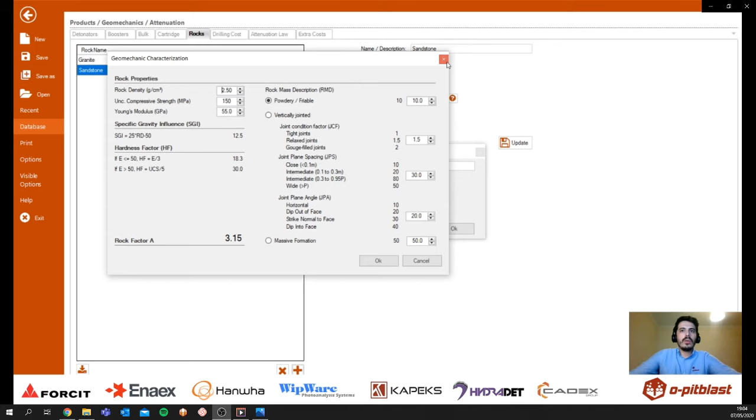This rock factor is the most important for our model, the Kuz-Ram modified model, and we have to understand how this is built. So you can enter the properties here, and it will generate a rock factor. But even if you don't know your rock factor, we will find it through measuring the fragmentation.

So we are studying this granite, and we'll go to the prediction. This will work like this: I will have this blast, and after this blast, I will check my fragmentation, and in softwares like WipFrag, our partners that are providing a trial license to everybody present in this webinar, we could calibrate our rock factor here. So what we'll do, we'll need the real data of this blast.

So I will open here a sample file, and this fragmentation analysis. So I have here my study, the fragmentation analysis from orthophotograph, and I will put this on my second screen, and I will calibrate this on O-Pitblast.

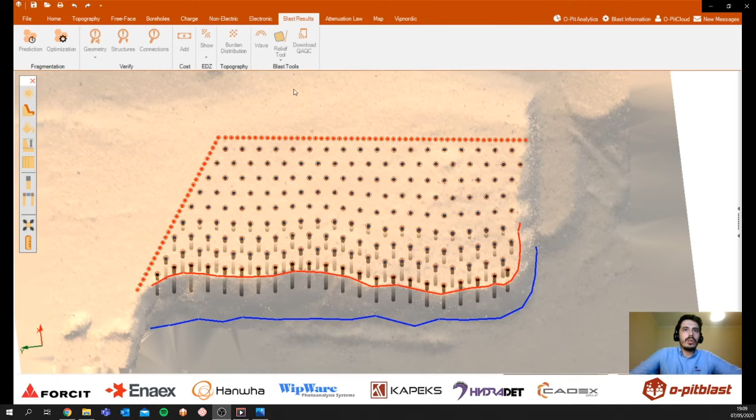So I just missed to talk about the report. It's something that's good. In every operation, our clients want to report about everything. So let's go here to print, and now we have the option of print and save to Excel also.

But basically we have to select what fields we want to build on the report. We can change some options and configurations. For example, the drilling plan, I have it like this. I have here the azimuth, I have angle, I can configure here the size, the size of the things.

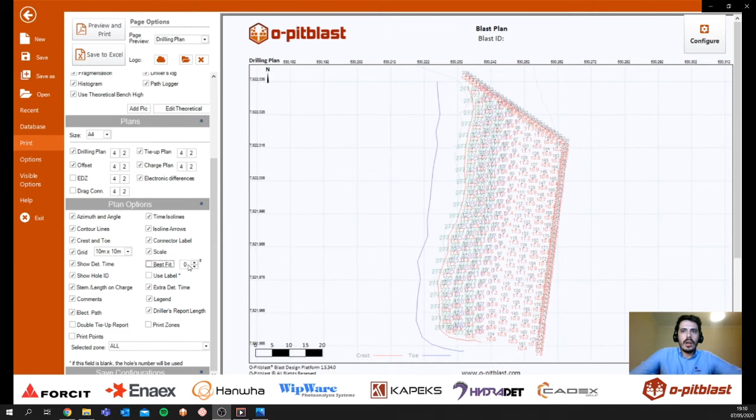Okay, I can personalize this, and I can also change other disposition. So basically, I have selected everything here. We can select the size, and we can put our company's logo also here on this side.

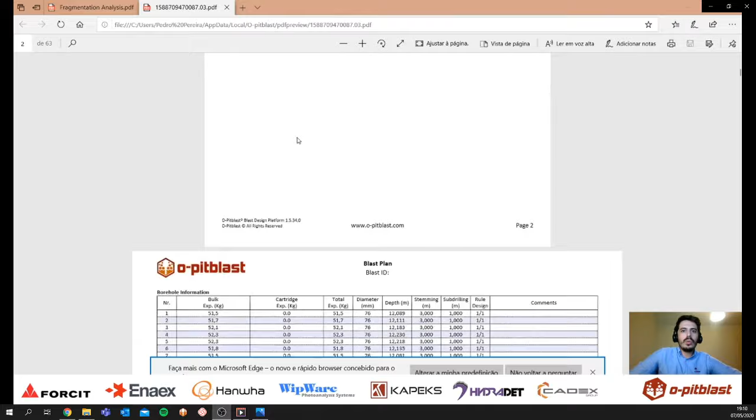But let's try and see our PDF that was generated, and it's here. Let's see. We have a resume of the blast. So we have here the explosive ordering, accessories ordering, detonating cord if I add, blast resume, some comments if I want to put, charge rule, list of boreholes. Let me see more what I have.

I have the drilling plan for the drill operators, detonators profile, detonator times, and I have here tie-up plan, isoline arrows, charge plan.

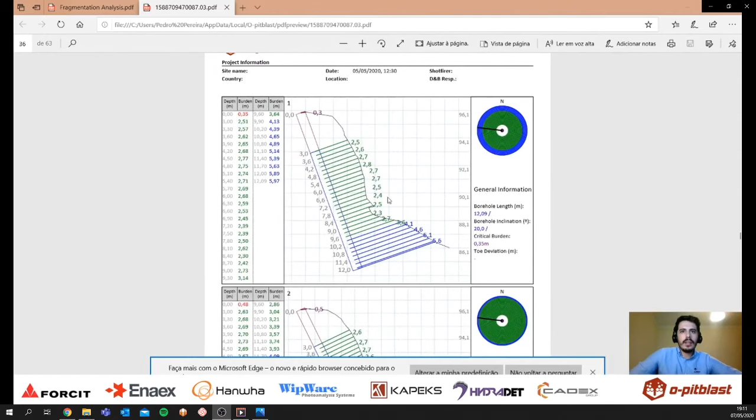I have here, this is very interesting, my critical burden profiles, and obviously this is theoretical. If I import here O-Pitblast information or from other competitors like Boretrak, you could see the real position of the hole, and you can study the critical burden of the real hole.

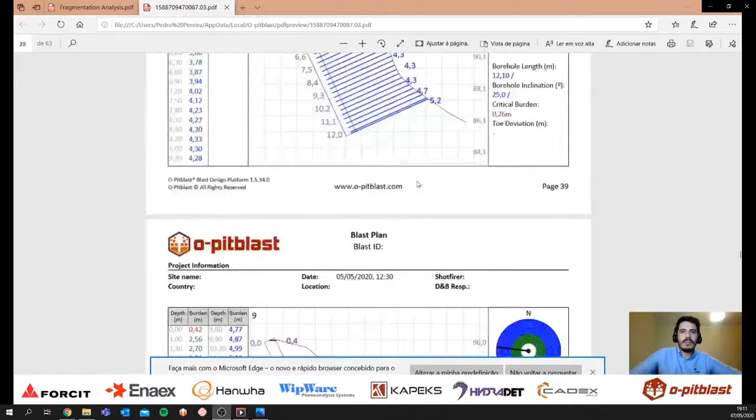This one I made carefully, but let's see some others that I didn't do so well. Obviously this should be adjusted, but that's the idea. So this is between the spacing of the holes.

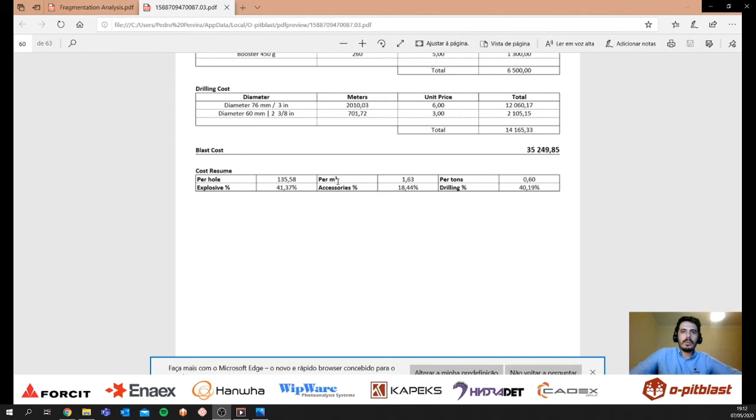We got the explosive ordering and cost breakdown, so per hole, my cost per hole, per cubic meter, per ton. Also we got the histogram per hole, and histogram per charge, and finally my prediction of fragmentation. This is basically what I have to show you guys.

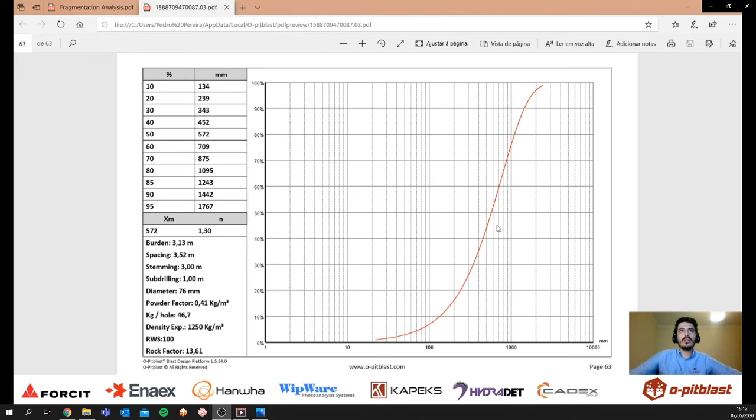Me and my team, also the team of O-Pitblast, started to answer some questions on the chat of YouTube. I have here the question of Gabriel Filinkowski: why did he put a deck between those layers, and what do the floor and roof wireframes mean?

Those layers mean different geologies, for example coal layers, and in some blasts it's interesting to not put explosives on those structures. The floor wireframe was actually the pit shell, so the last shape of the mine after excavation.

Also, Tristan asked us: O-Pit is limited, how many points can it import from a 3D point cloud? So O-Pitblast software can work smoothly up to around 350,000 points. But O-Pitblast 2, the next version of the software we will release early next year, will be able to handle point clouds with a million points.